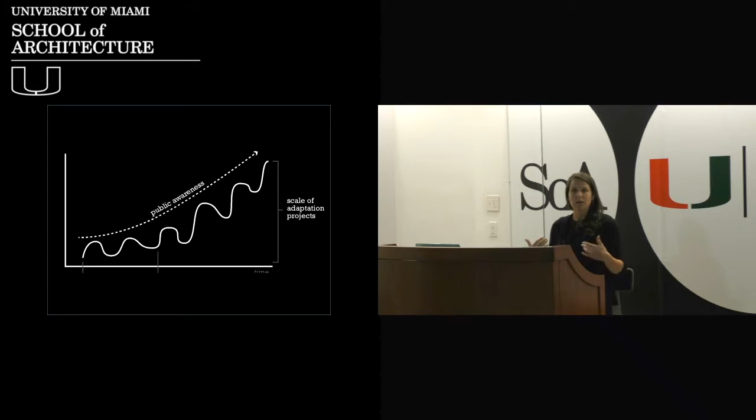The idea is to understand the environment and understand what those shocks and stressors are, and how you can prepare for them and use those as opportunities to continue to make a better community. We have examples like the Chicago fire, where sometimes tragic events can provide more opportunities to rethink how you want to live in your neighborhood or community.

I just want to quickly announce that later this morning, we're going to become part of what's called the 100 Resilient Cities Initiative. This is 100 global cities, really different - you can see we have Pune, India, Quito, Ramallah in Palestine, Porto Alegre in Brazil. All of these places, including many US cities, have different shocks and stressors, but there's still a similarity between cities. By creating this network where we can all work together, we can think through these challenges together and think about how we can make Miami more resilient.

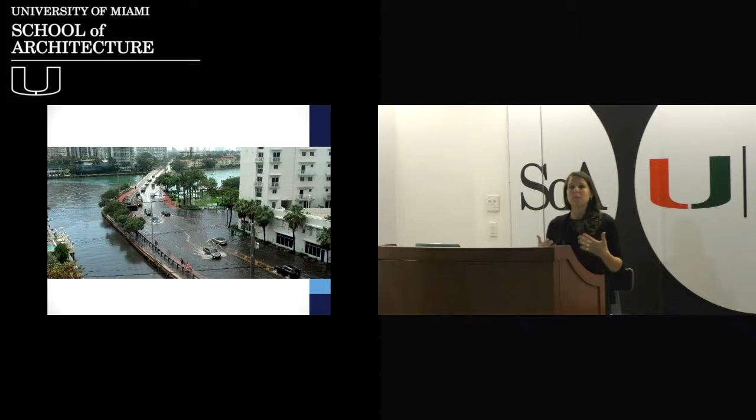So in our application to become part of this program, we listed a bunch of shocks and stressors. Obviously the shock that comes to mind first is hurricanes. But we also have other chronic stressors in Miami, like the inequality and disparity between different neighborhoods. That's also a chronic stress that weakens our ability to bounce back after a storm. We know certain communities are going to have a harder time bouncing back, so how can we know that and help everyone prepare and create stronger communities?

I just wanted to talk quickly about one of the biggest stresses for the community, which is sea level rise. Hopefully this is old news, but in case it's not, I'll go through some of the causes and consequences. The sea is rising because we have a very thin atmosphere, and because of human activity releasing greenhouse gases and altering the surface of the earth with deforestation and urbanization, we've changed the composition of the atmosphere and how the earth responds. So we're warming our atmosphere, and that's causing our sea levels to rise.

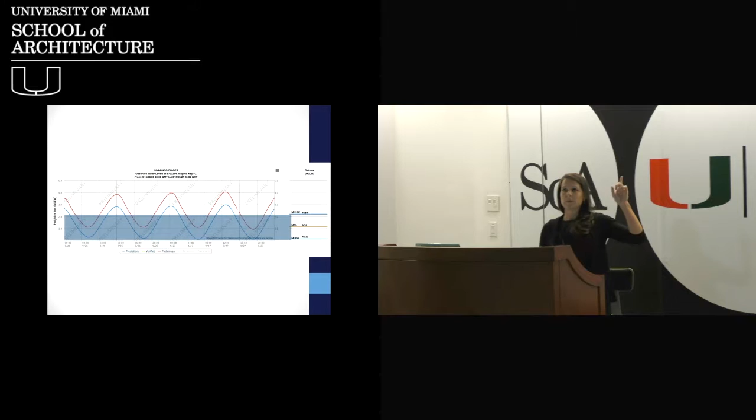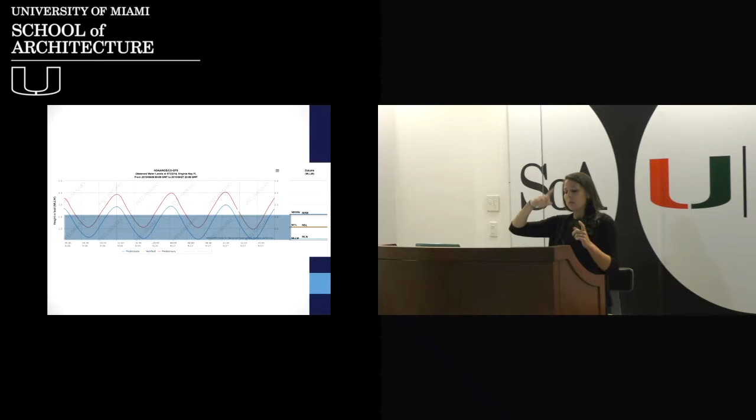We have really long records here, going back to 1910 in Key West, where we can see this long-term trend, ticking up at about 2.3 millimeters a year. But we can also see this in the short term - this is a graph from last October. The blue box represents what we typically see as low tide and high tide, and the blue line is what we expected to see throughout the day as there's high tide and low tide. But the red line was what we actually saw - almost a foot higher in some cases than what we predicted.

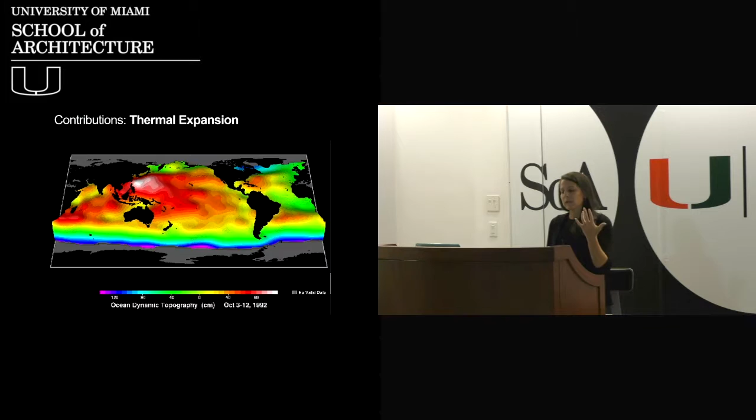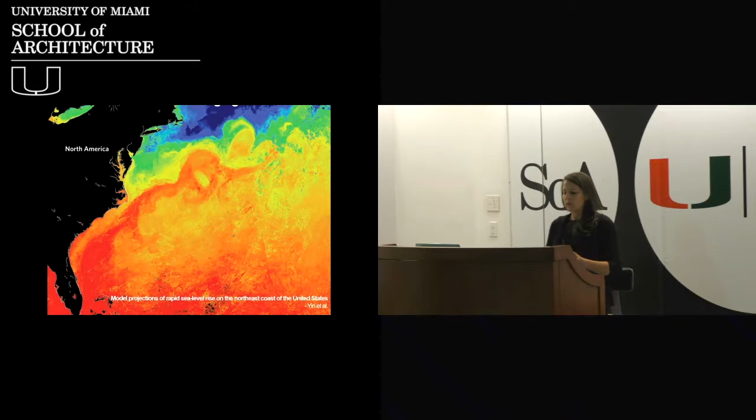That's due to some of those longer term changes with the ocean warming, but also at that moment because all of these changes are affecting ocean currents as well. Here in Florida, the sea level rise is affected by the strength of the Gulf Stream, and last October, the strength of the Gulf Stream slowed down. That might just be a periodic trend, or it might be a longer term change that we should adapt to. But nevertheless, there are a lot of reasons why the sea level is at different points every minute of the day. We know these long-term trends are very important.

So some of the reasons why we've seen sea level rise in the past aren't necessarily going to be the most important in the future. The most important in the future is going to be the land-based ice sheets in Greenland and West Antarctica. I say they're most important because on a human timescale, during the time that I'm alive and you're alive, we're not going to be able to reverse any melting that we have on those ice sheets. It's very important that we be as conservative as possible and try to prevent the melting or slow that melting as much as possible.

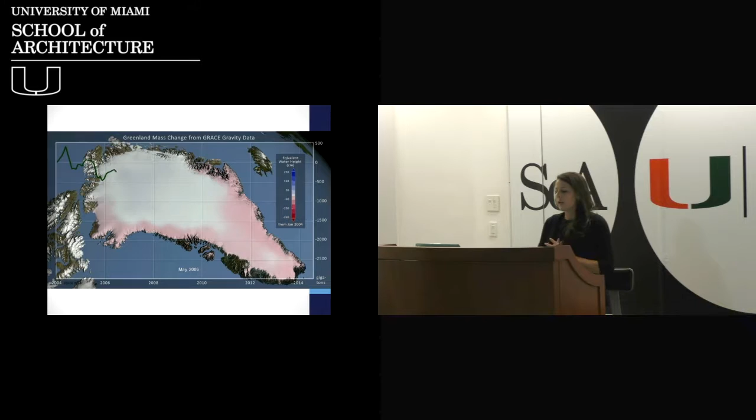So this is a little animation showing how in Greenland, we're losing mass or ice from the actual ice sheet, and that's entering the oceans. The red areas are where we're seeing the loss of mass or the loss of ice, and obviously, the darker the red, the more mass you're losing.

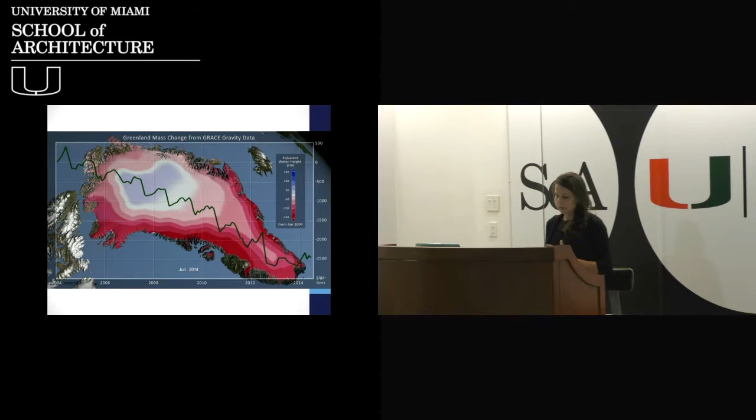You can see it's mostly on the edge and mostly on the southern side as well. This is a trend from 2004 to 2014, so we have a 10-year record for this animation, and you can see how those changes are coming about. It's affecting almost the entire ice sheet. Just if you're curious, this is measured by measuring the gravity, which other people can talk about if you're interested.

So the other major area that's important for South Florida is the West Antarctic ice sheet. You can think of Antarctica in two parts: the eastern side, which is hopefully more stable because it has a lot of high mountains that help trap the ice, and the western side, which is lower and more vulnerable to melting. What you can see here in this animation is how the ice is sliding towards the sea, where there are darker colors, that speed is faster.

So what that looks like on the edge of the ice margin, you can see here, there will be these intermittent breakups. Sometimes it's very slow and seasonal, and then sometimes you have these nonlinear or relatively quick changes right at the edge. There's sound as well, but I'll just narrate through it. A lot of these changes are speeding up now because we have warmer ocean temperatures.

The warmer ocean temperatures are coming into contact with these ice sheets, and as they break up on the edge, that means that everything behind them can move more quickly to the sea. So it starts a chain reaction throughout the part of the ice sheet that's connected, not the whole ice sheet, but just the part that's connected. There are certain places where we know these dynamics are more important, and you can see here in the red some of the areas of West Antarctica that are most concerning. Let's try and skip these.

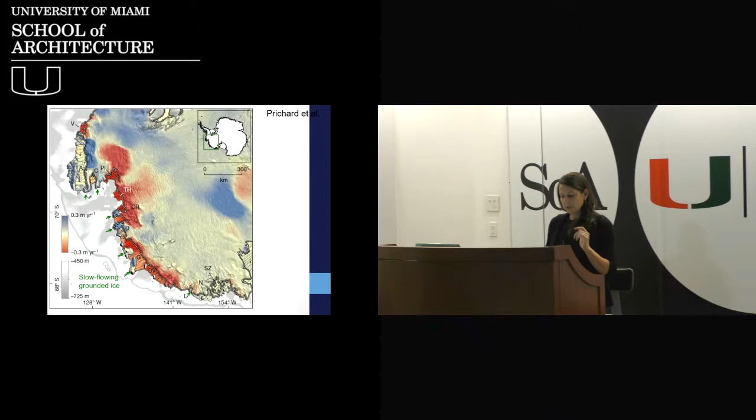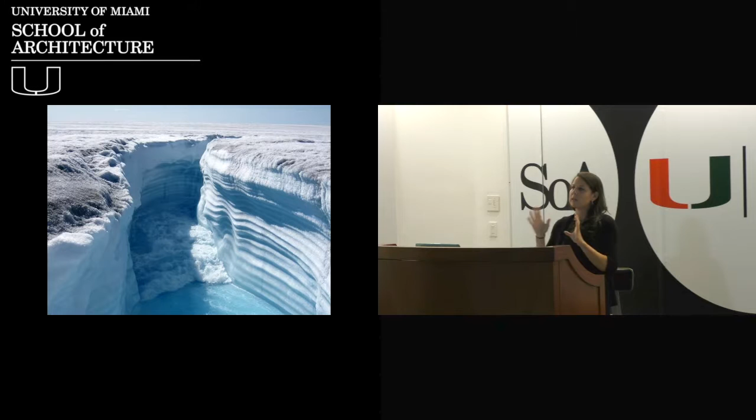So the big picture, though, is that right now we have a warmer atmosphere and warmer oceans because of human activity and natural cycles, but the ice sheets haven't caught up to those warmer temperatures. Kind of like when you take ice out of the freezer and put it on the counter, it doesn't all melt right away. It takes a while for it to reach equilibrium, and that's the state we're in right now. The ice sheet isn't really in balance with the temperature of the air and the water, and it's adjusting.

So you might think 3 millimeters a year, what's the big deal? It doesn't sound that scary. But one of the things is that the shoreline responds differently. If it's a hard edge, if it's just a wall, the water will just move up. But if it's a soft shoreline, it can move sideways quite a bit in a process of erosion. And you can see that on the beaches here.

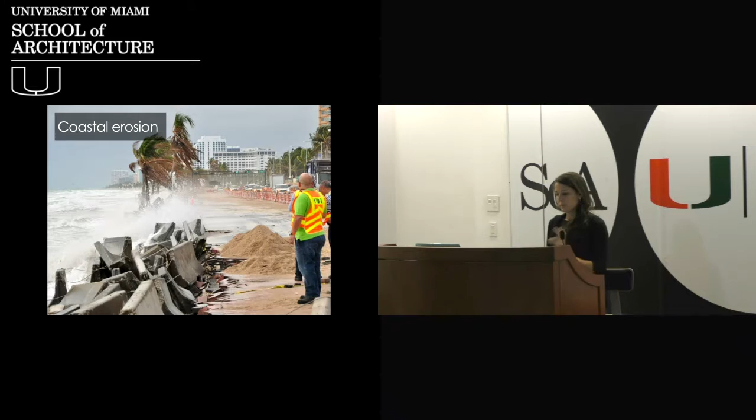So up here we have part of the beach where you can see it's where people are living. They've managed the beach to try and hold it in place. But naturally, the ocean and the barrier island would be in equilibrium, and the barrier island would migrate in response to the higher sea levels. And the same thing is true with mangroves—just a slight change in the water level, and those could move quite a bit.

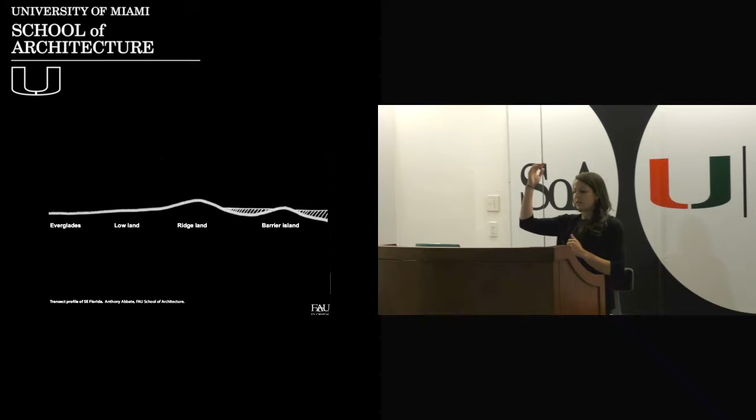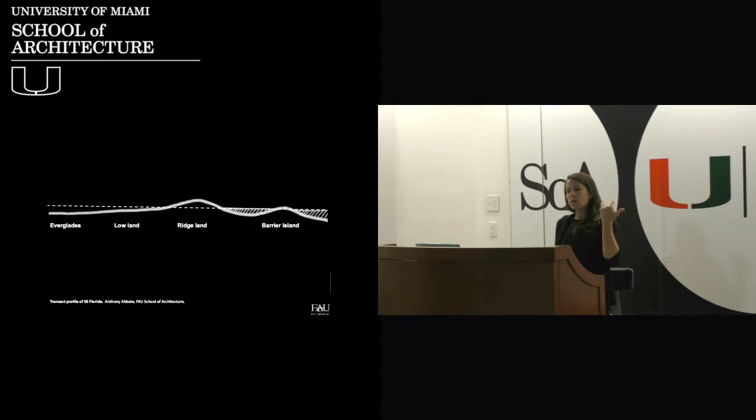So I'll try and speed up here, but generally speaking, we're not just thinking about the coastal areas in Miami. The shape of Miami—we have high points on the barrier islands near the dunes, we have high points on the ridge, like where we are now, and then it goes lower as you go closer to the Everglades. So as that water level rises, there's also a risk of flooding in the inland areas, and you can see that sort of pile up when it rains.

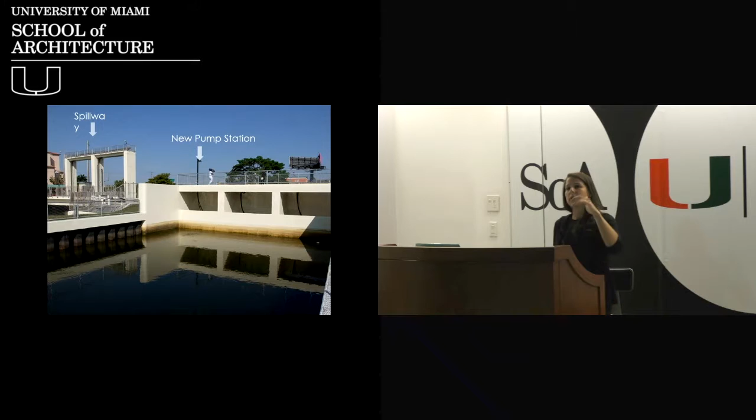Our system of pumping and managing water used to rely on gravity. It used to just flow from inland down to the ocean. But as the ocean level rises, that gravity system doesn't work as well, and we have to transition to a system of pumping.

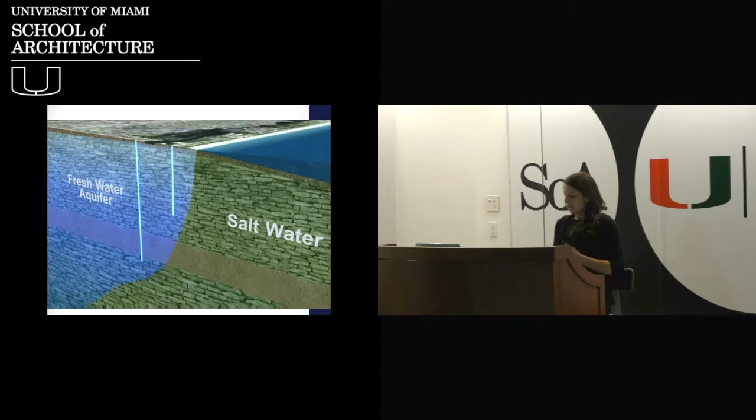We also have to look out for how sea level rise will affect our aquifer. Because the ground we're standing on is very porous, water between the ocean and the mainland can move very easily, and as salt water moves inland, that can also affect our drinking water. That's a vulnerability we have to look out for.

The other challenge, which is why we have a room full of you to help, is that because the ground is so porous and the water moves so easily, we can't build walls like they have in New Orleans or the Netherlands, because the water will just bubble up from underneath. So we have to be more creative and think about how to adapt or respond without using walls.

These are some examples of other places. We can't stop the sea from rising, but there are lots of ways we can think about responding.

This is an example from New York, where they created a breakwater to help protect them from storms. When a storm comes, the wave energy is less and it doesn't cause as much damage. But they designed it so that the crevices and shape of the structure were best for fish habitat and creating other habitat, so they could also improve water quality and environmental quality.

Another idea out of the Netherlands is a concept they call building with nature. Instead of using fixed or rigid structures, they're trying to think about how to use nature, which has a living quality, to respond and adapt.

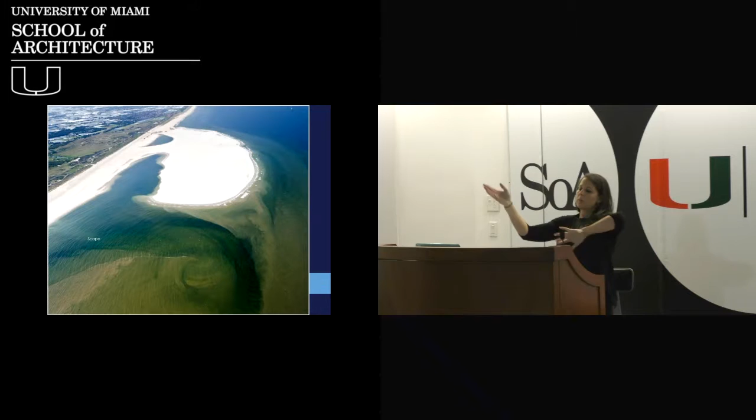In this example, they created an artificial island called a sand engine, which over time breaks down and is carried by the currents, but it helps protect their beaches and the communities downstream. Another example is managing the water in our cities in a better way so we can capture and hold some of that water.

Right now, in a lot of urban areas, when it rains it hits a hard surface like a parking lot or a road, moves quickly, picking up pollutants on the surface, into a pipe and then into the bay or into a well.

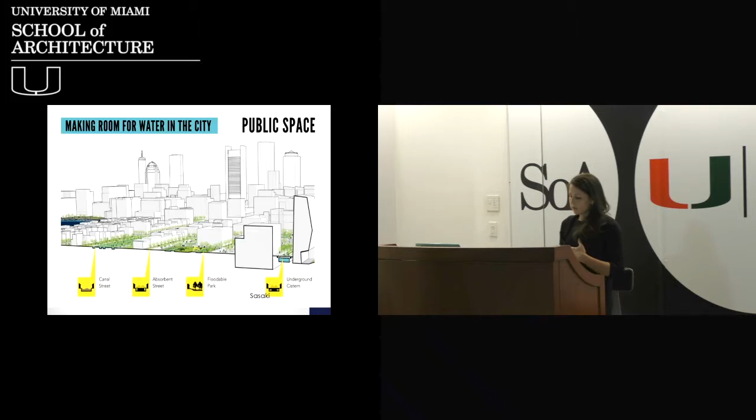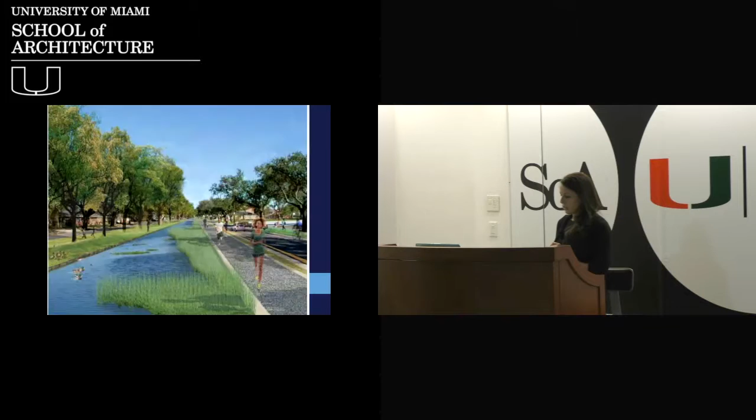And they have multiple purposes. When it rains, they can catch the water, but in dry weather they can also be a park space. This is another example.

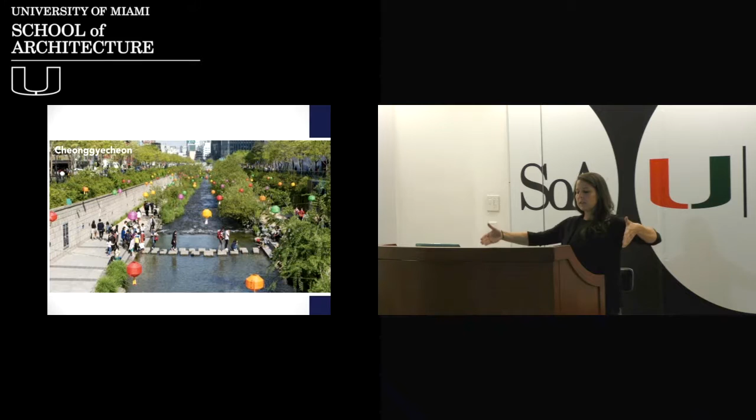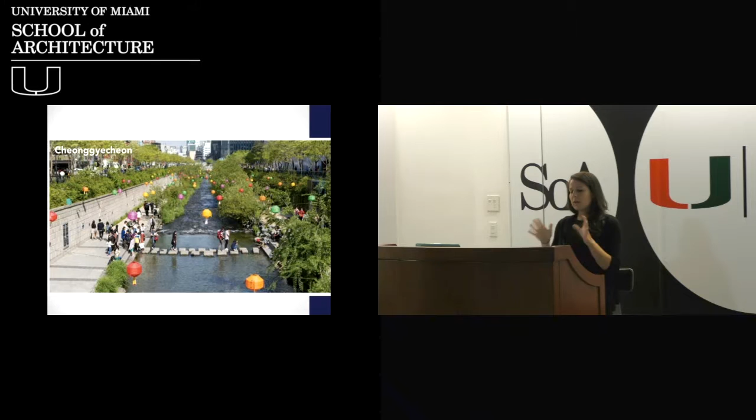You can see there are tall walls on the edge, so that as the river floods, it keeps that water within the catch basin, but when the water level is low, people can use it as a park space to walk through the center of the city. I think this river also used to be underground, and they actually excavated it, so to speak, and made it visible.

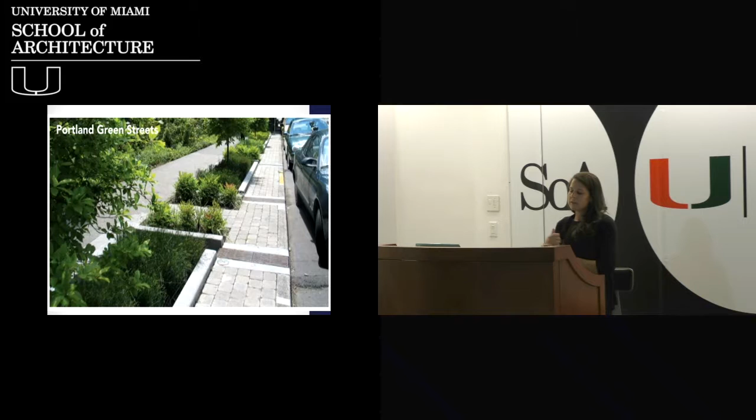This is another example of green infrastructure from Portland, where they use the spaces in their sidewalks. They cut little holes and grow small rain gardens, which help catch the runoff from the street, but also improve the environment and provide shade.

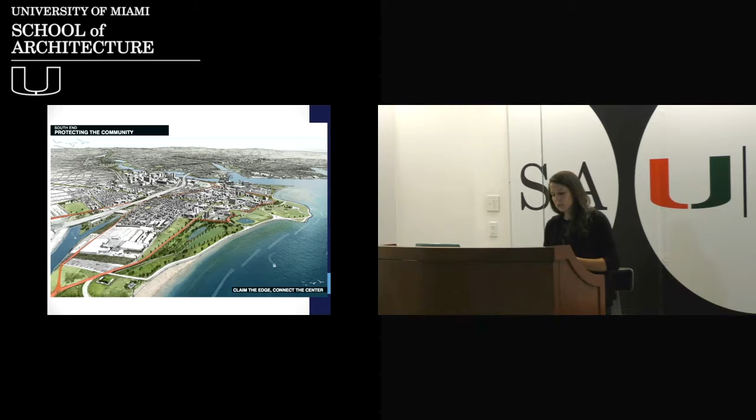For Florida, the most important defense against storms is the mangroves. They've evolved to be very protective, and it's important to think about where the mangroves are and how we can protect them, because as sea level rises, they may need help to respond and keep up if they're already stressed. If they're healthy, they can likely adapt and keep up, but if they're stressed, or if there isn't enough sediment, or if there are other stressors, they may not be able to keep up with sea level rise.

My last point is that there are great tools online. This one's called the Coastal Flood Exposure Mapper - you can go online, look up your address, and see what hazards exist for your area. Sea level rise is one, but storm surge and flooding from rain events are also factors. You can see all these different hazards and what your area is vulnerable to. One of the projects we're starting in our office is looking at some of these most vulnerable areas and thinking through how they can respond and adapt.

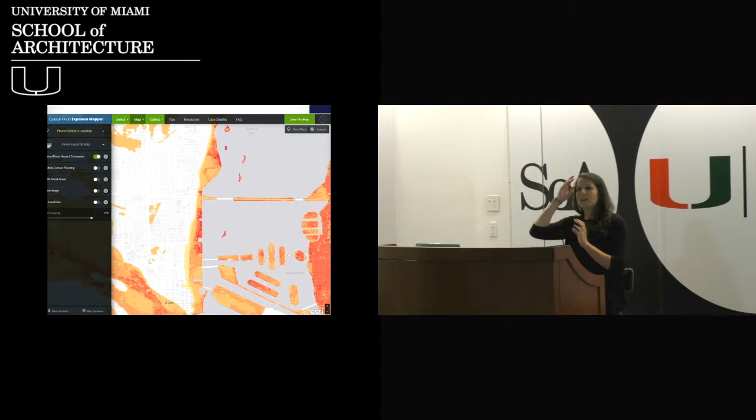One of the first areas we're looking at, which I should have a picture of but don't, is up in North Miami, in the Arch Creek area around Johnson and Wales and the FIU Biscayne campus. If anyone is from that area and wants to get involved, you can reach out. We have a lot of projects going on through our office, mostly on policy, but if anyone wants to be involved in helping us think through these solutions, we're all ears and would love your help.

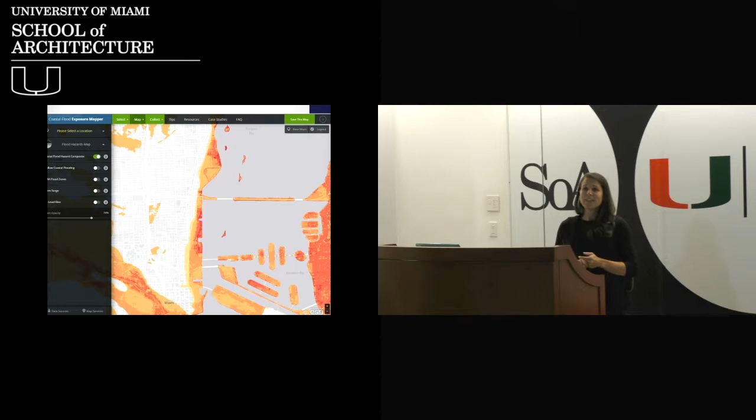I'm going to recap really quickly some of the things we've been talking about so far. And I'm going to move us forward and talk a bit more about how we can start to think about our own neighborhoods, think about resilient cities and buildings that include all of us as part of that conversation and those considerations.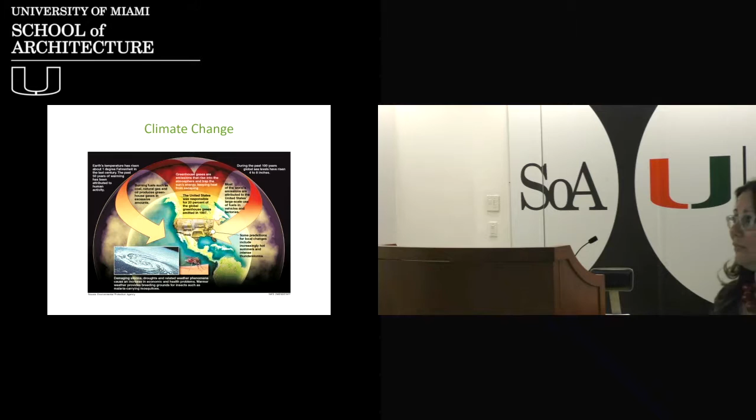So far we've heard about how we as humans have had an impact on climate, and how our human activities have gotten us into this mess. We've learned that we've accelerated the amount of greenhouse gases being emitted into the air. We've heard about how our cities are largely responsible for that - a great percentage of those greenhouse gas emissions, approximately 78%, are coming from our cities, even though cities are only about 2% of the land mass on planet Earth.

But right now we're at 50%, but as you heard before, populations within cities are going to continue to expand in the very near future.

As we all know, every time we do something, there's a consequence for it. Here in South Florida, that means we're going to have to deal with climate changes and challenges in an increasing manner. Some of our communities are already grappling with these challenges. We know this means increased numbers of extreme weather events, such as hurricanes, but it also means we'll have extreme rain events that cause flooding more frequently. There will be more heat wave events, and we'll even have more wildfire events in our inland areas.

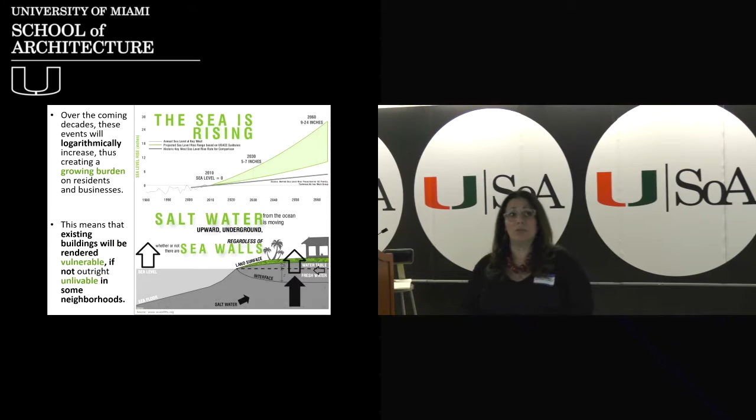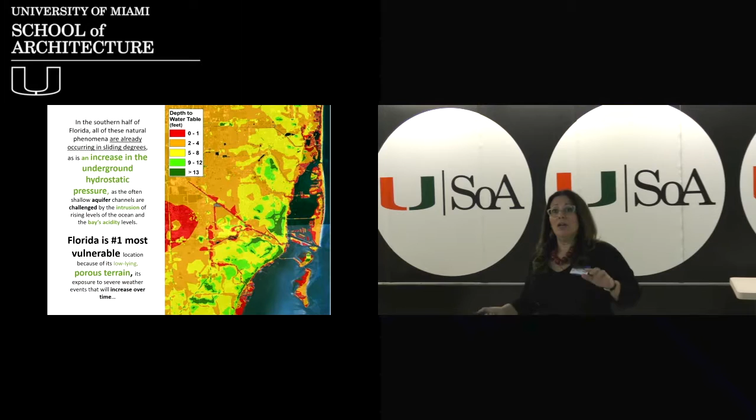We also know there are going to be increasing ocean temperatures, as you've already heard, that will result in higher sea level. Sea level rise is really important to South Florida because we're very low-lying, and we're also challenged by the very porous limestone base we're sitting on, which means we'll have to deal with something called hydrostatic pressure. Combined with the fact that much of our aquifer in some areas is very shallow, some of our neighborhoods are going to be challenged with dry day flooding. So we have all of these consequences converging upon us, and we need to figure out how to become more resilient and deal with them.

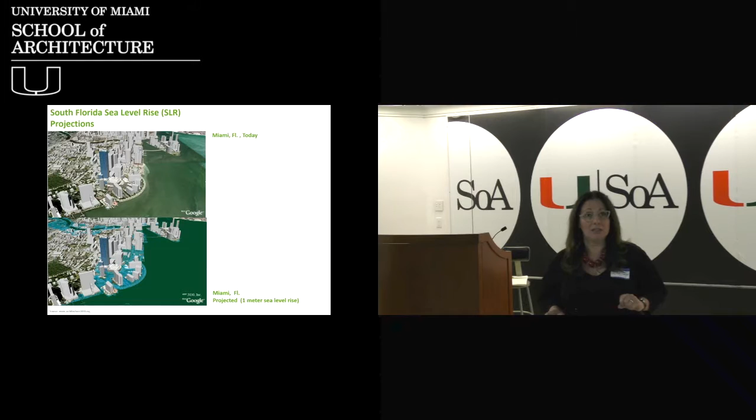Now, if you don't think this impacts your life, I'm going to go through a couple of quick slides to show you. This is Miami's Brickell downtown area, the port area along the Miami River, but this is what that area would look like with only 1 meter of sea level rise. Think about it—that's our business engine for all of Miami-Dade County, one of the main industrial ports in the whole state of Florida.

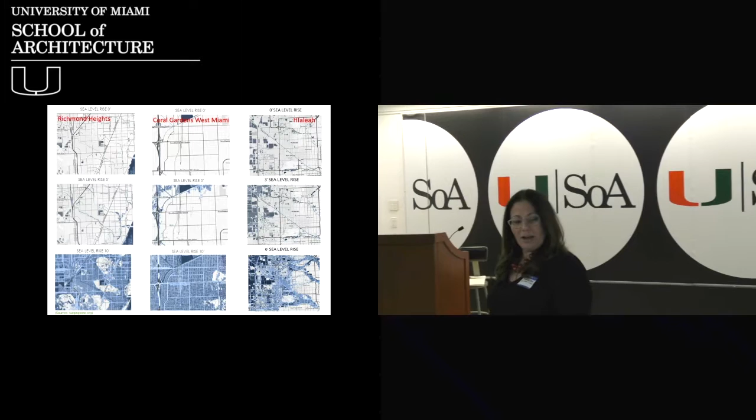But here's some of your neighborhoods. You can see how even your neighborhoods, which may be further inland, are also going to be impacted by sea level rise in the very short term. A couple of examples here: Hialeah, Coral Gardens, Richmond Heights, Allapattah, Key Biscayne.

And we haven't really talked about storm surges. Storm surges are those large waves of water created by the energy of hurricanes. As sea level rise continues to increase, that storm surge, as you can see in the slide behind me, will also increase. So those further inland, who have always thought, 'I'm far from the coast, not my problem'—guess what? You're not only dealing with hydrostatic pressure, not only coastal sea level rise, but you're also going to be dealing with storm surge activities you probably didn't think about beforehand.

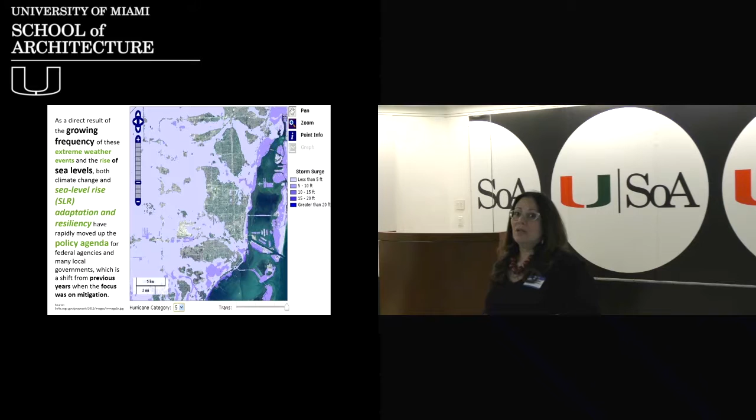And so a much greater part of our population will in fact be impacted. This is what we could look like if we got a Cat 5 hurricane accompanied with storm surge. All of a sudden, as my colleague Hal Wanless says, we start to look a lot like the Florida Keys.

Now, we can continue to think this is not our problem, that I don't need to deal with it, my family doesn't need to deal with this, someone else will—some scientist in some far out lab will come up with a magical bullet and fix this for all of us so we can keep living the way we do today. Well, guess what? If we stay on that path, this is where we're headed. I don't know about you, but it looks to me like my home is no longer around. Is yours?

It means that we actually do have to think about taking personal responsibility and about being part of the conversation today. If we haven't already been part of the conversation, we should become part of it today. Each and every one of you can decide to either sit back and do nothing, or become a leader that drives positive change in your communities. It's your choice. It's your planet.

So what do we have at our disposal to do that? We have a couple of words I want you all to feel really comfortable with: adaptation, mitigation, and resiliency. What do those mean to you, your families, and your communities? Adaptation is a series of strategies dealing with consequences we're going to have to tackle in the near term. Mitigation strategies, on the other hand, are things that help us become more responsible citizens and take care of the planet in a more responsible manner than, as Mr. Cintron said, we have done thus far.

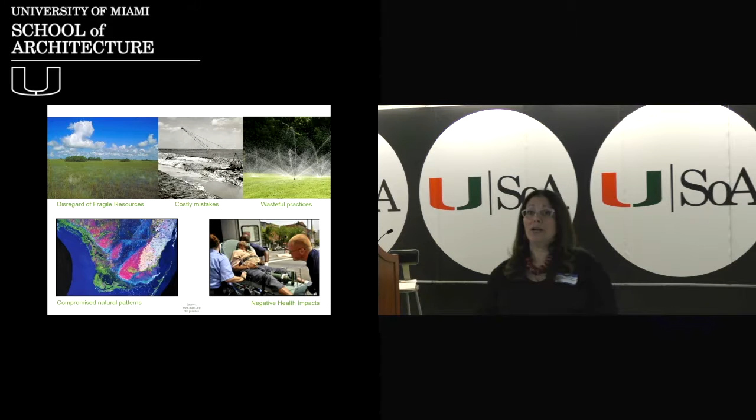So why are we in that car? Well, we're going to talk about that in just a second. But some of the other things that are contributing towards these problems have to do with how much energy we're consuming, whether it's to air condition our house or to keep the food in our refrigerator colder, or how many times we decide to launder our clothes. It also has to do with how much waste we're producing. In the last 30 years alone, we've almost doubled the amount of waste that we're producing and that we're placing into our planet. And about 15% of that is toxic.

We also know that we're not managing our water resources well, and that the planet is already undergoing a process called desertification, which means that by the year 2025, approximately 50% of the world's population will suffer from the scarcity of potable water. And who's to say that that won't include us, right?

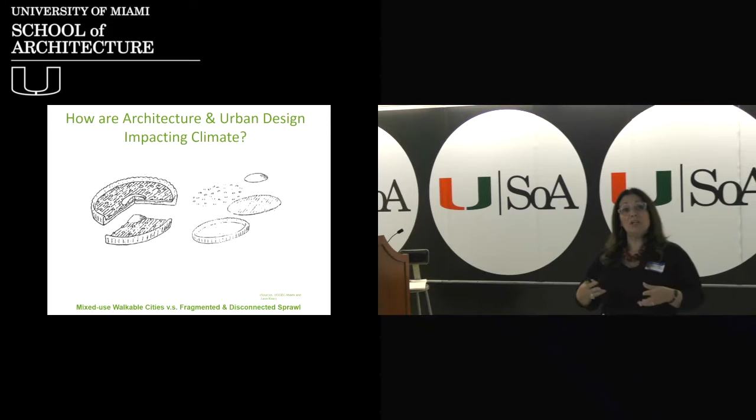Well, that's kind of how we used to create communities. We used to create communities that were whole, that had an identifiable kind of identity to them. We had a clear sense of where our government leaders were because there was a main street, there were town hall buildings, places where we knew we could engage others in civic spaces. And we knew there was a sprinkling of mixes of uses and people throughout our community, so they were walkable. But now, since the advent of zoning...

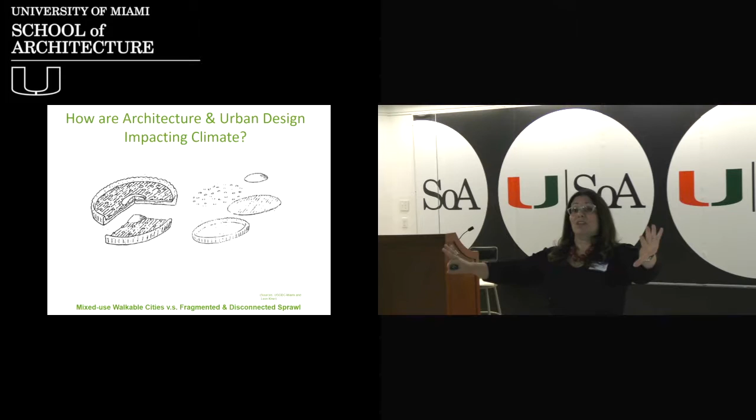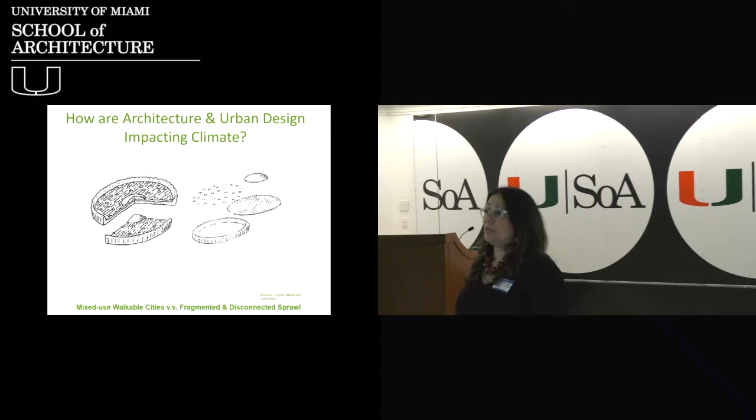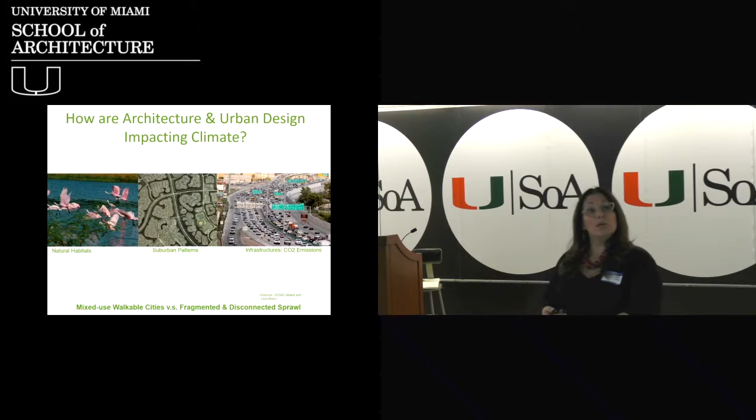We started to divvy everything up. We divided everything up. So it's no longer really a pizza, any more than it's really a community when we do that. It just becomes a series of fractured pieces put together. So we can decide to do the same things we've been doing for the past 60 or so years, and continue to have a negative impact on our natural resources by continuing these bloated, disconnected ways of creating suburbia that make us car dependent. Or we can stop for a moment and think about what it means to really be a community.

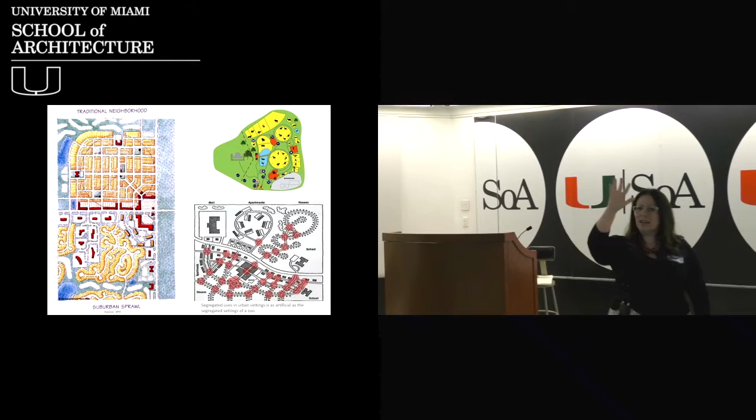Much of suburbia is completely disconnected. So what happens is we've become a lot like a zoo, right? Think about the last time you were at the zoo. You arrived and there was this one big main artery that everyone walked on. Think of that as the highway that connects us all. Think about how jam-packed that was on a special holiday weekend in particular.

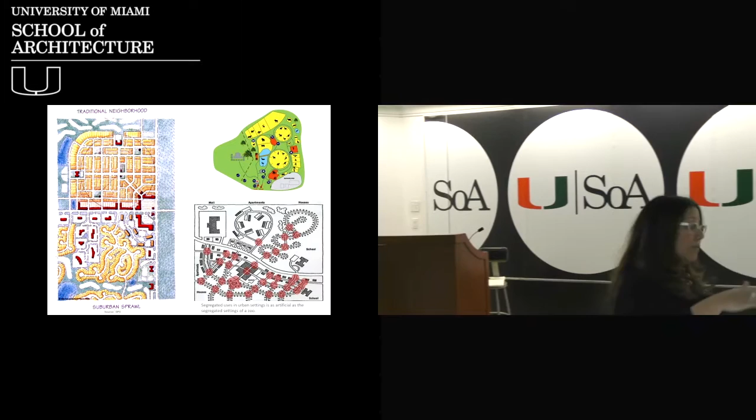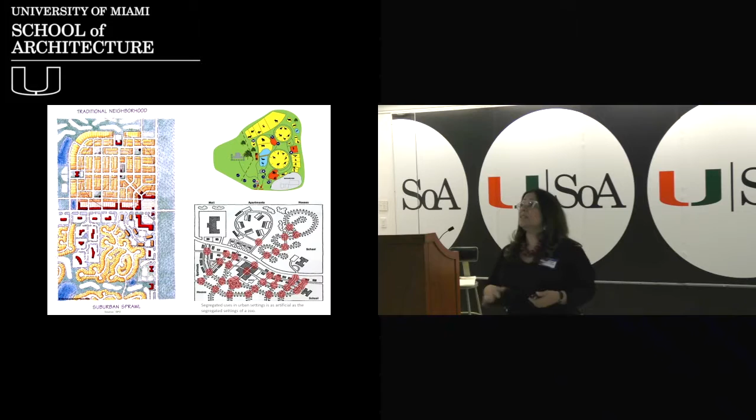So you got off that main highway and walked over and saw the lions for a while. You got back on that main highway, went a little farther, and visited the monkeys. Oh, that's great. Then I'm going back, and I skipped these because I don't like those, and I skipped those because I don't like those either. I kept going and arrived at the birds because they're great, I love them, stayed there a while. Came back onto my main road, and that's how I visited these animals in a setting that is completely artificial. And that's why they're all depressed in those zoos, by the way, because they're not in their natural environment, any more than we are when we're in communities that are completely disconnected from each other.

In fact, society has greater issues related to mental health today, in part because we've forgotten how to relate to each other.

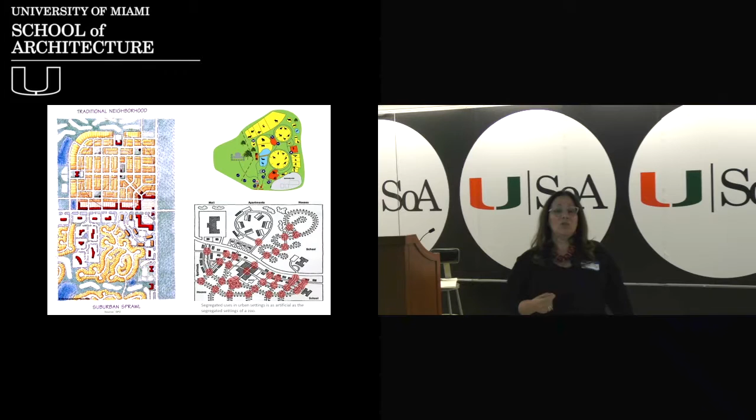We're always in our car, perhaps with our iPod or a phone next to us, God forbid, and we're not really talking to anyone. We don't know anyone other than the people essential to our activities. So we've lost this notion of civility and interaction, and that's why we are weaker as communities, because we've lost the capacity to engage.

So we can do the same thing as the very wise Forrest Gump said: stupid is as stupid does. We can continue doing the same things, or we can learn from the past and rethink how we make places.

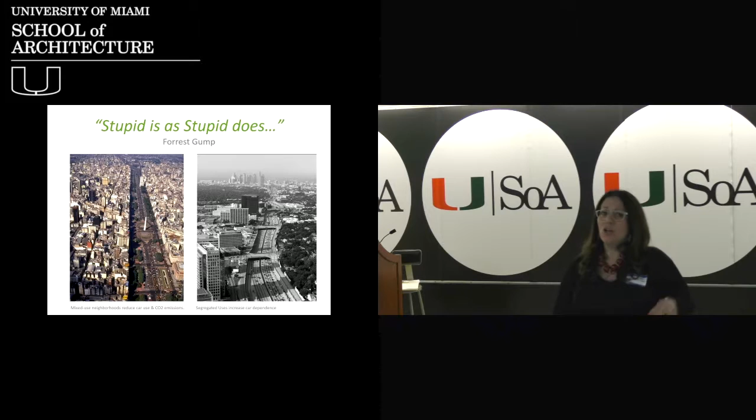We can create places that are whole, that have mixes of uses, including parks, civic monuments, structures that are religious or civic, different types of housing, and places where we can work. And I can walk there if I choose, or use a metro line, a bus, or a bike.

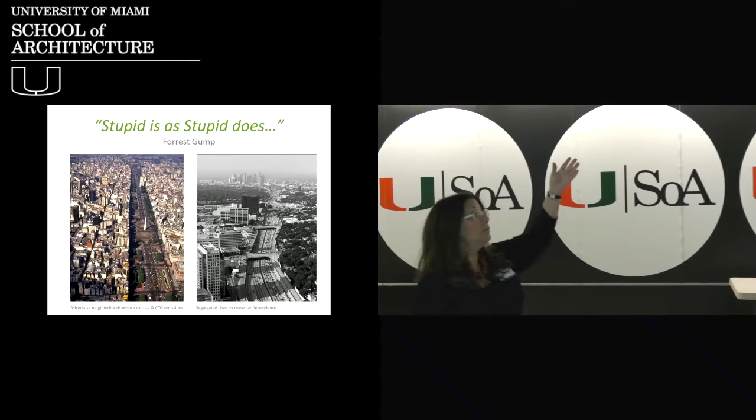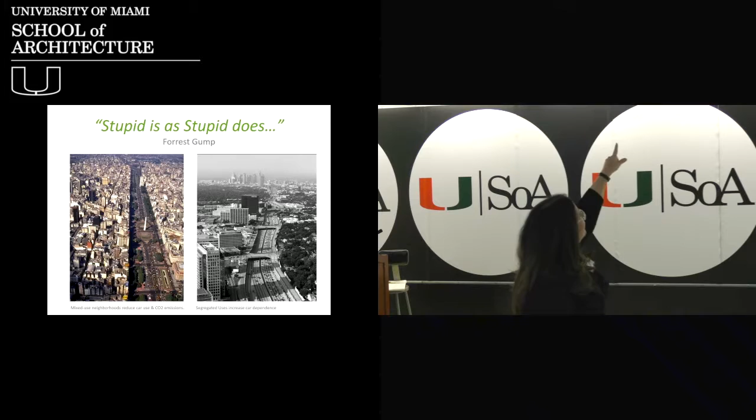Or I could be in this other environment. How pleasant is that, sitting on the highway, baking in the sun, waiting in traffic to get from building number one over to the black building in the background. And notice the wonderful smog sitting over the city beyond.

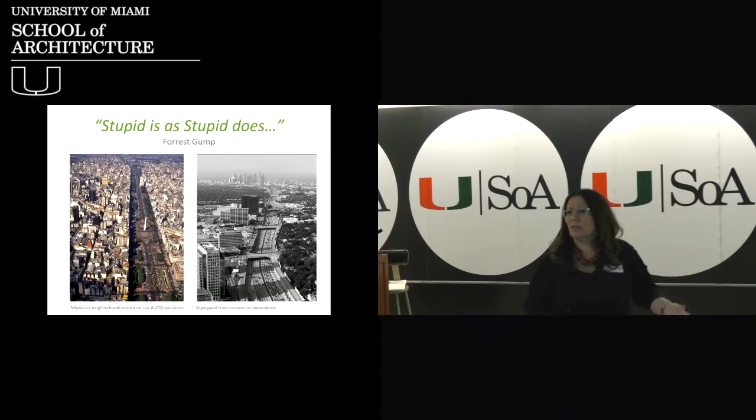So everything is disconnected. We can keep making these places, and these places in fact create social inequities, because not everyone can afford that car, right? Not everyone can afford the time it takes to get from point A to point B, or the gasoline, or the vehicle itself.

Public transportation—is it viable? Is it a good alternative? Does it really work? So we have to start thinking about what barriers are not allowing us as a society to thrive, much less be resilient.

So to really create a resilient community, we have to think of ourselves as these neighborhoods that are completely self-sufficient.

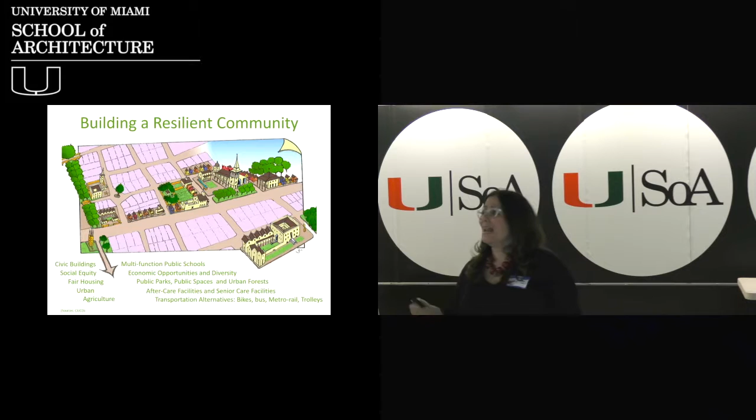Now, you all are too young to know about Hurricane Andrew, but the older folks in this room that lived in South Florida remember what Hurricane Andrew meant. They lived through it. We remember how it changed our sense of place, how it impacted our economies, and how neighborhoods were solely reliant on that which they could walk to, right?

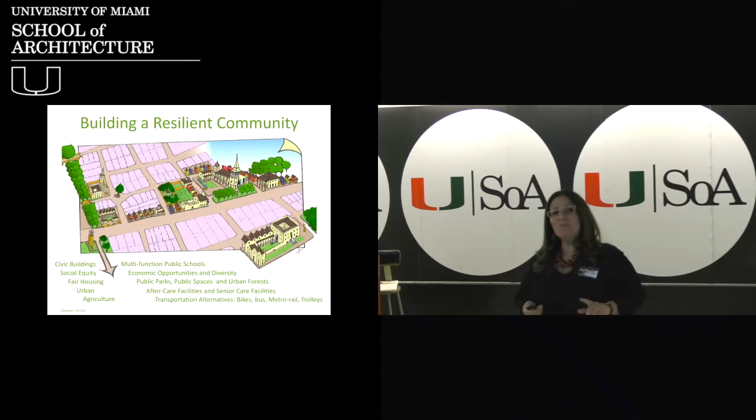So let's think about resiliency as thinking about communities and neighborhoods as being whole. And that's what we want you to think about: what are the missing pieces in your neighborhood that are needed to make your community whole?

Are we living by the principles of creating transportation choices for everyone, affordable housing for everyone, economic development opportunities for everyone? Are we trying to support our existing communities? And are we really valuing our communities, our historic buildings, and the people that live in these places?

So to be really resilient, these are the things you're going to want to tackle. You're going to want to make sure your community is walkable. If it's not walkable, why isn't it? What do I have to do to make that community more walkable? Is it because I don't have enough mixes of land uses? Is it interesting for people to walk? Is there a tree for me to have some shade as I'm trying to get from point A to point B? Are there transportation options?

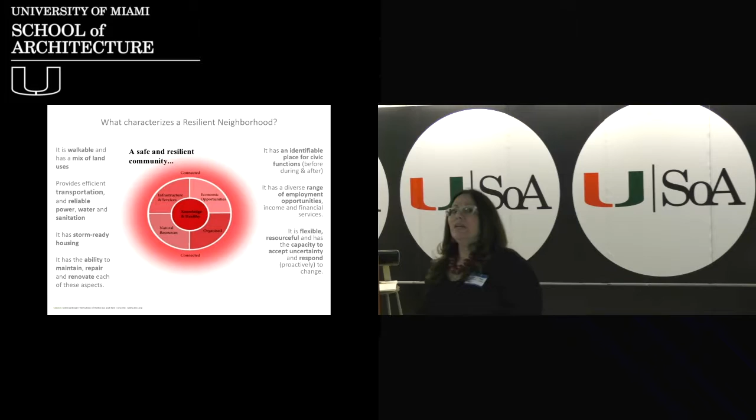You're going to want to think about everything from making your house storm ready to making sure that your community can survive and become even stronger if there is an extreme weather event.

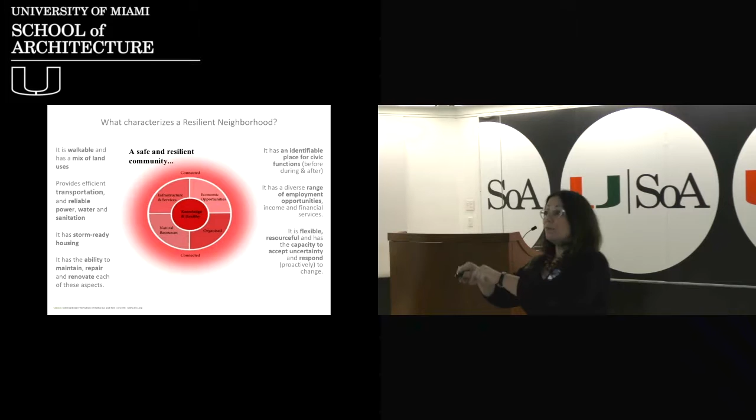And we've learned from Hurricane Andrew that, in fact, those communities that were most resilient at the time were not rich or poor, but rather they knew where to go get help. People living in Florida City, in Homestead—those folks knew exactly where Main Street was. They knew that FEMA was going to arrive in those locations, and they got their help before some of the folks living in unincorporated areas that didn't know where to go, right?

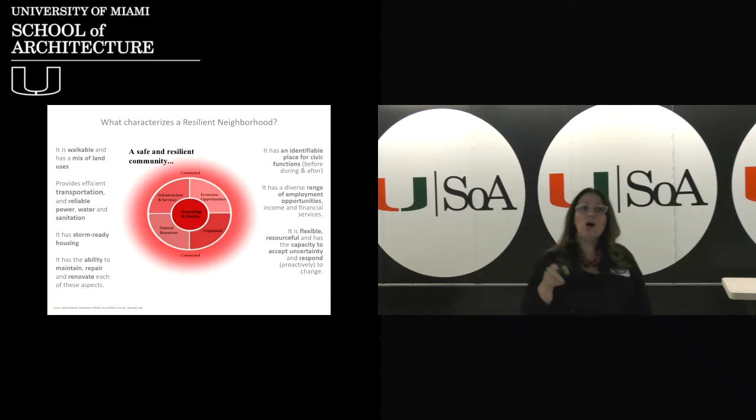So creating a new heart to our community is important, right? Because through that process, we'll not only create civic identity, but we might even create larger economic opportunities.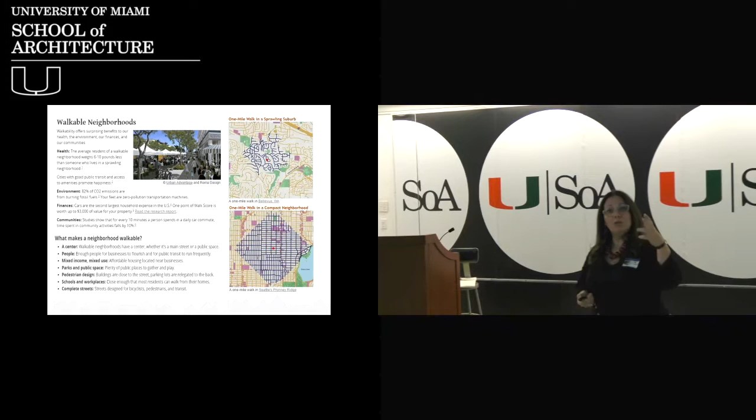So we're going to really focus on creating walkable neighborhoods that have all the types of amenities that are needed to allow us to be more self-sufficient.

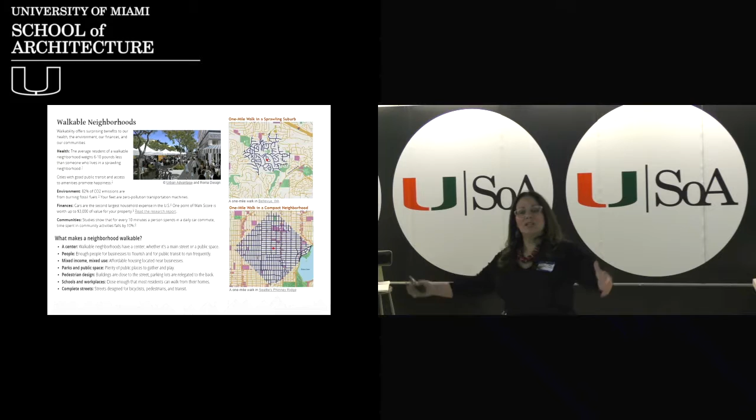I want you to look at the two diagrams on the right-hand side. These are a one-mile walk in a suburban sprawling neighborhood versus a neighborhood of interconnected streets. And you can see how quickly that pedestrian shed expanded just by the simple design of those streets.

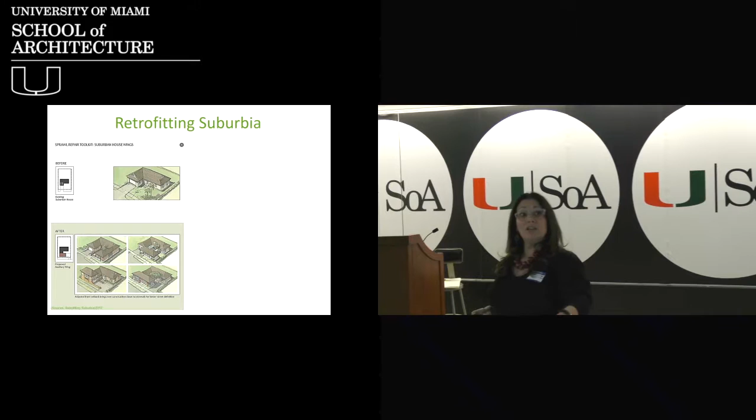So some of you are going to tackle suburban problems, and you're going to say, well, how do I create more diversity? I might change the single-family house and suggest that it could have other uses—small businesses, mom and pop shops. Could it have a granny flat on top of it? How do I create changes in the housing type that already exists?

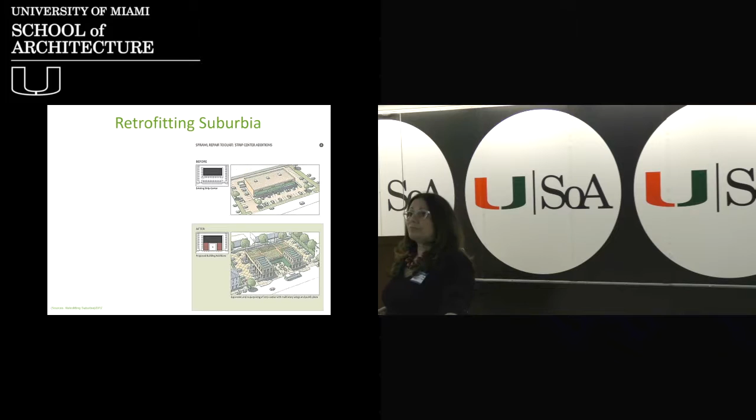How do I change businesses along a street that pretends to be commercial but really is just an ocean of parking, with a building set back somewhere far back from the so-called pedestrian street?

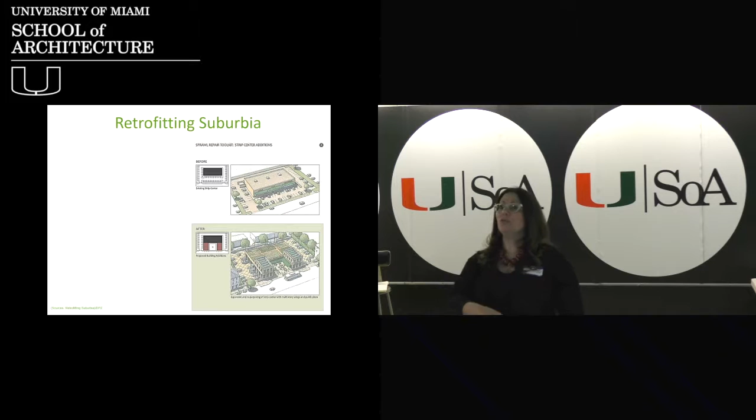Think about how we also include things such as urban agriculture, so that the areas in our neighborhoods stop being about cars and start being more about people and places for people. We also want to start thinking about how we regenerate our natural systems and use them to our benefit. Those of you dealing with coastal areas in particular want to pay attention, because those coastal systems will increase our capacity to have food readily available, and they give us a natural resource that helps protect us. Not from everything—they're not a magic bullet—but they are one of those elements that can contribute to making us more resilient.

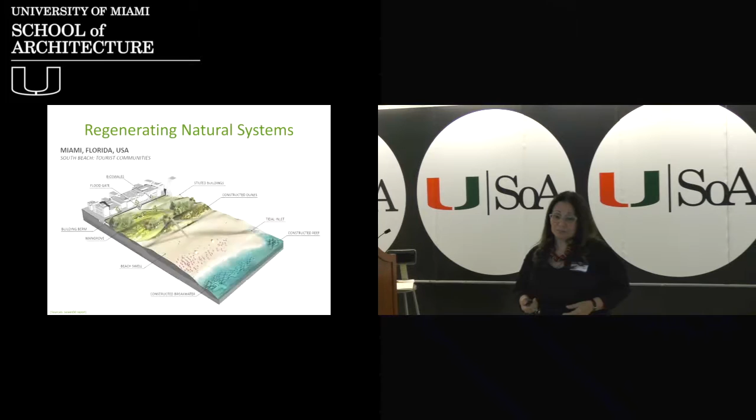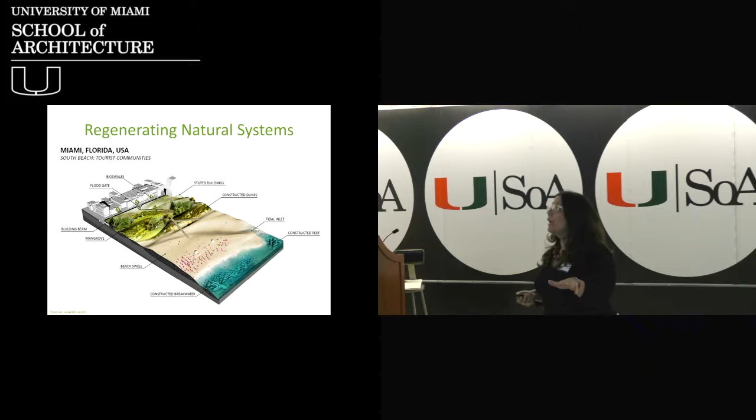So you may think about different ways to impact that coastal shore in your community. This might really impact those of you looking at coastal resilience. But what we should all be thinking about is how we create more urban forests.

The reasons for that are clear: they create places that are shaded, cooler, with more pedestrian activity, meaning more thriving businesses along the street and more places for people to congregate and be together. It also helps improve our air quality and helps us collect some of that extra stormwater. So we're really focused on resilient neighborhoods for everyone, and creating places for everyone in our society.

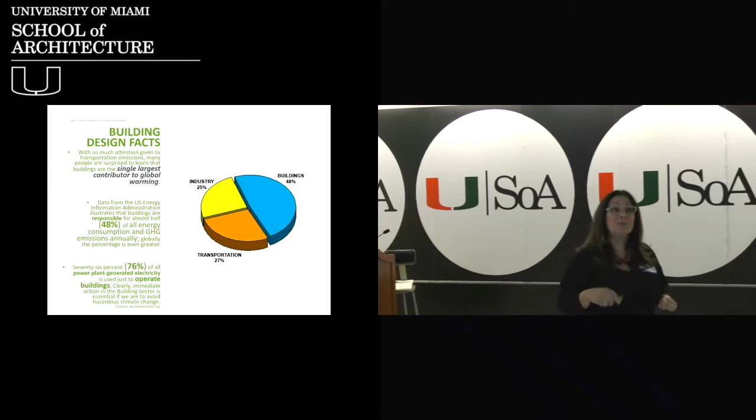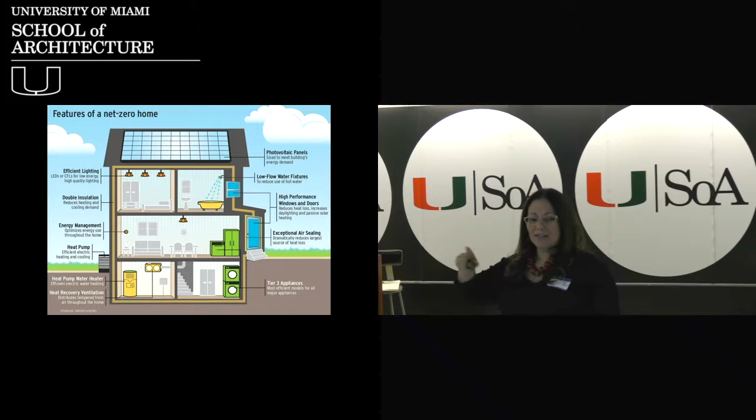And the buildings—well, we're not going to spend too much time on them, but I want you to go away with this thought: the way that we design buildings really matters. That's because 48% of the energy being consumed is actually going to feed our buildings. So that's why an interesting term, if you've never heard about it—write it down and research it when you get back to your schools—is called net zero homes.

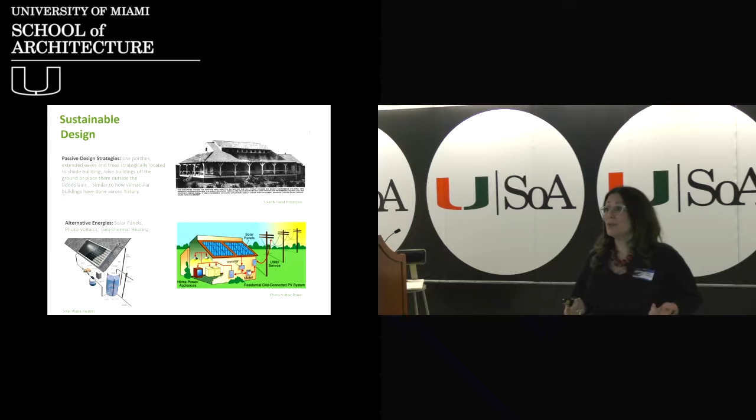You and your families should be looking at that as a possibility to make your own families a bit more resilient. And learning from the past—well, we want to do that too, because before we had air conditioners in South Florida, people knew how to build a building for South Florida. They knew how to put porches on them. They knew how to lift them off the ground in case there was any flooding. They knew how to build a building that could allow us to live here comfortably.

So hopefully, by the end of the day, we've had an opportunity to think about what are some of the most vulnerable items or aspects of our communities. We've tried to tackle them, to be sympathetic to the image of our city while being very realistic about who we are and how we're moving forward in this conversation called resiliency.

Three important words we have to remember when it comes to resiliency: we're going to try to protect, but we may sometimes have to retreat as well, and retrofitting is somewhere in between. So some communities are going to have to say maybe this isn't a long-term kind of place, but what can I do to make it livable and thriving in the short term? We need to be very, very responsible as we continue to have these conversations with others, so that we know what the reality is and plan accordingly.